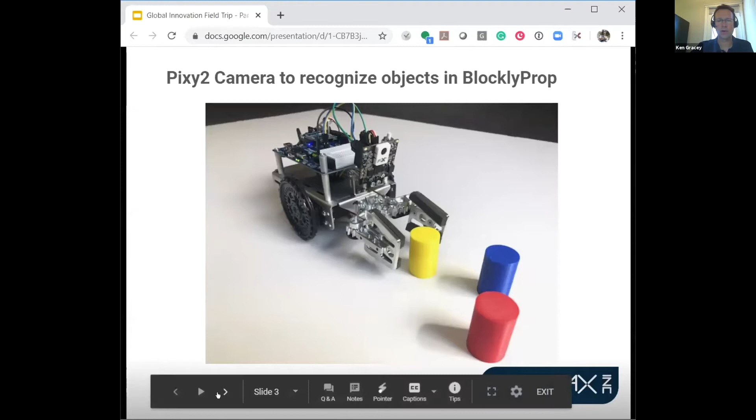Because for years in educational robotics, we've been using sensors that detect things and their distance. Like laser sensors could work up to 100 meters, infrared can detect people walking into a room, infrared emitter-receiver pairs can tell you when something is nearby, ultrasonic sensors work up to 10 feet.

So there are a lot of good technologies, or even physical bump switches, but these are all just detecting whether or not something is in front of you. Something, I say, because it could be almost anything, but whether or not you can see it depends on the technology you're using. Like a fuzzy stuffed animal may not be seen by an ultrasonic sensor. Students get to learn about these things pretty quickly - this is usually where they go.

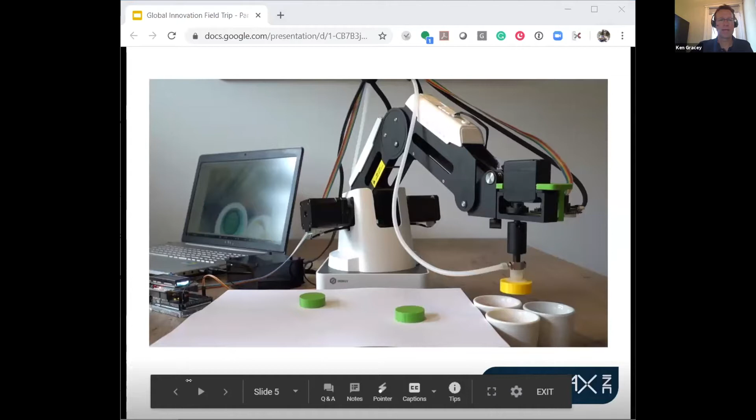I think where they're headed, though, is to do things that are quite a bit more complex in time, because I'm seeing it now. So for example, here's a robotic arm, and this is moving around some items of color, like some little round discs, picking them up, placing them somewhere.

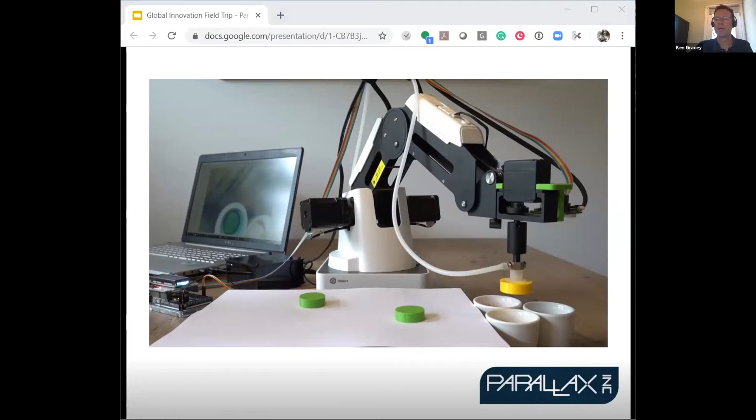Or how about this? This is a little more human-oriented task - picking up an object. What color is the object? What do you do with it?

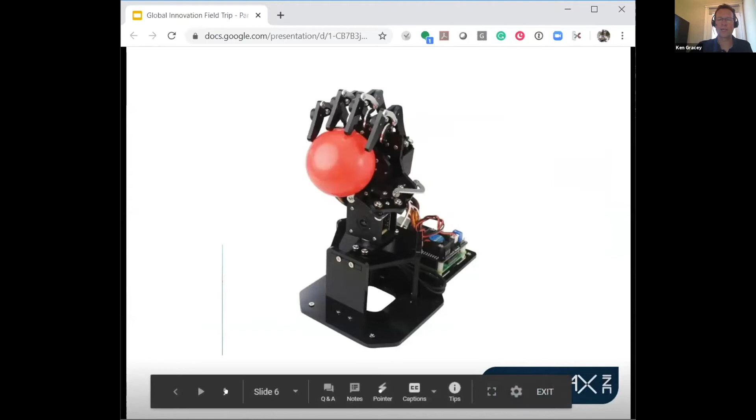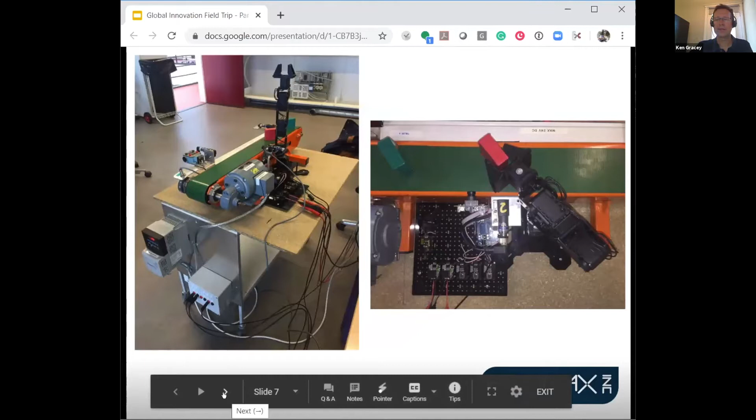And then we're seeing some stuff like this, conveyor automation type things. Also really neat, Legos can factor into this. And we're seeing games that can be played against robots.

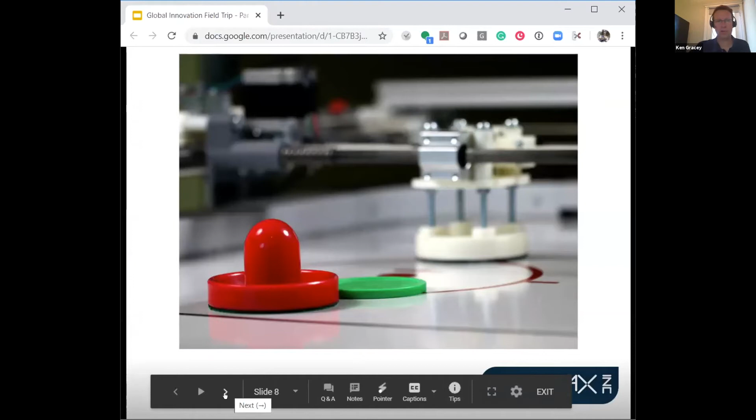Okay, so if you can track a color object, you can actually create some kind of actuator to attach to it, hit it, or bounce off of it, or move a chess piece or whatever. And of course, we see a lot of robots like this.

It's not easy. And even though we have tools now that can identify these objects, count them, sort them, what do you do with all that information? How do you code around it? This gets really tricky really fast.

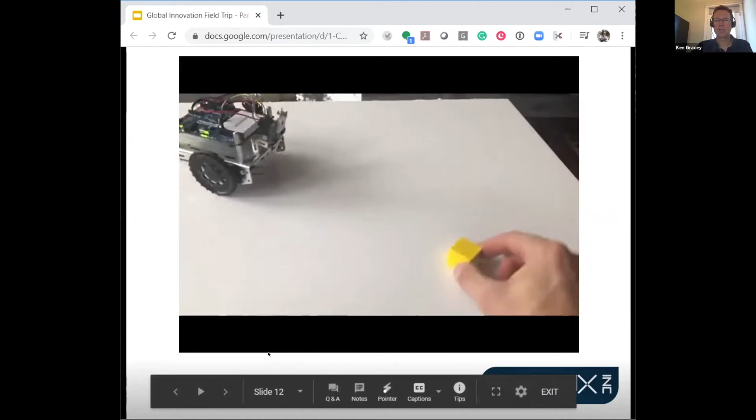So my little project that I used to learn about this started out like this. I'll show you the beginning, then the end. Here's a little robot, and it's just tracking this yellow block. This project probably took me about a week of coding to get to. But the great thing is, every time someone goes through this process, they post the code and share it. It's available for others, so I'll provide links in the chat at the end.

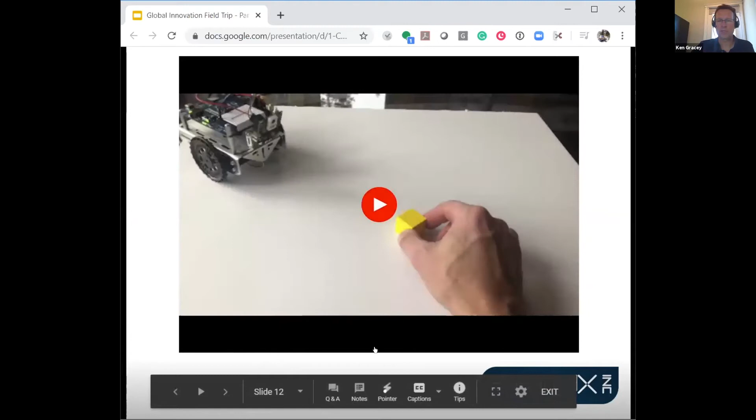Okay, so that's where I started. Now where I wound up was somewhere kind of different. So you've got to look at these projects in pieces. You have to break them down into little pieces when you're working with this, or when students are. So this is some advice I can give you.

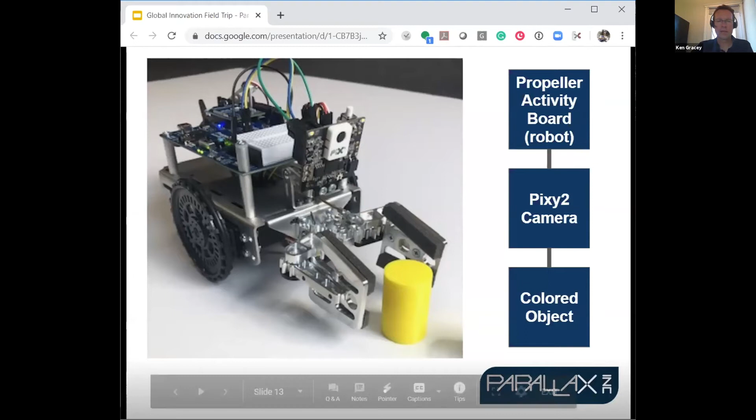It doesn't require a lot of skill. You can learn online how to do these things, but you have to be able to do subsystem testing. You have to break these problems down into little pieces with a block diagram. So here's a block diagram of the problem we're working with, or I should say the hardware.

What I'd like to be able to do is pick up the yellow cylinder and move it around. So I have 3 pieces to this really: I have the robot, shown in the top block, which has a little chip on it. Then I have this Pixy2 camera, which can detect the object and talks to the robot. And then I have the object itself. So I've got these 3 things.

An environment has everything to do with making something like this work. Again, we take this for granted as people, kind of like Oscar was showing that drone flying around in a closed indoor area, it doesn't have GPS, it has to detect objects. We take this all for granted because it's so easy for us as humans. So let's look at one piece of this at a time, just briefly.

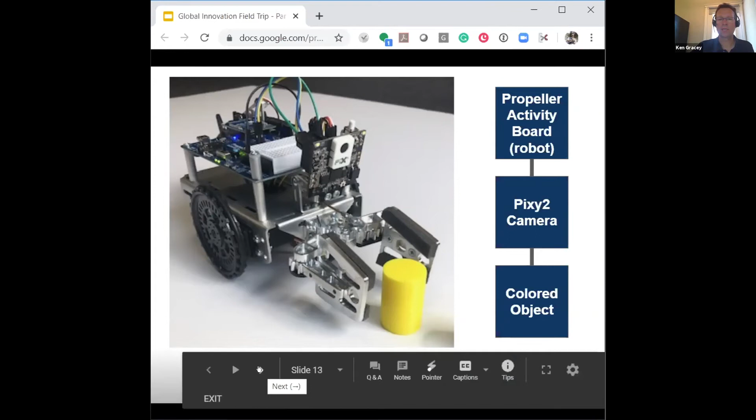Then you've got to write some code. Again, as I mentioned, this work having been done by many people, it's available online, not just for this but for other things. So for students doing projects, we really just have to help them find the resources and get them the hardware.

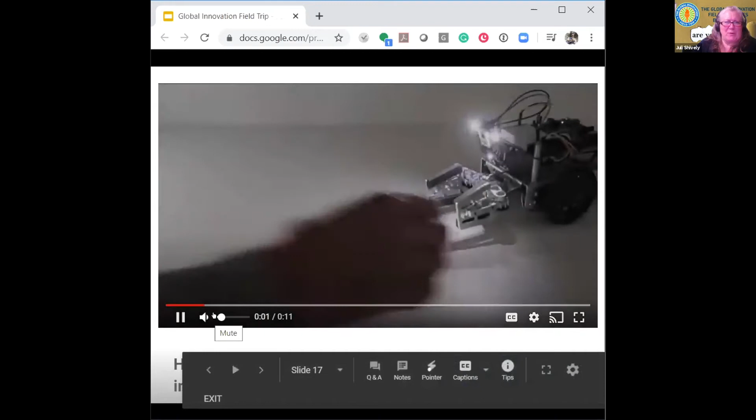Anyway, here's the result that I got out of it, after working for a while. And it wouldn't look as complicated 24 hours ago. Yeah, exactly, in a way 24 hours makes a difference on how we look.

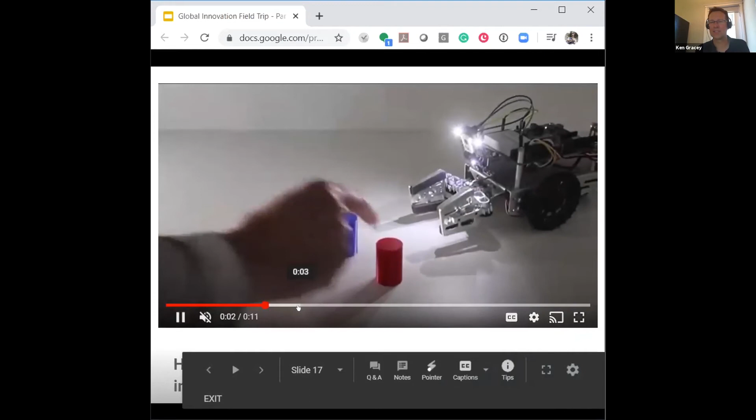You guys are hanging in there. So what happened in this video, and I'll play it again, is the robot took an inventory of what it was looking at, swept from left to right, and it was coded to go for the yellow one. And so it determined where it was in its X and Y viewpoint, and then just went after it.

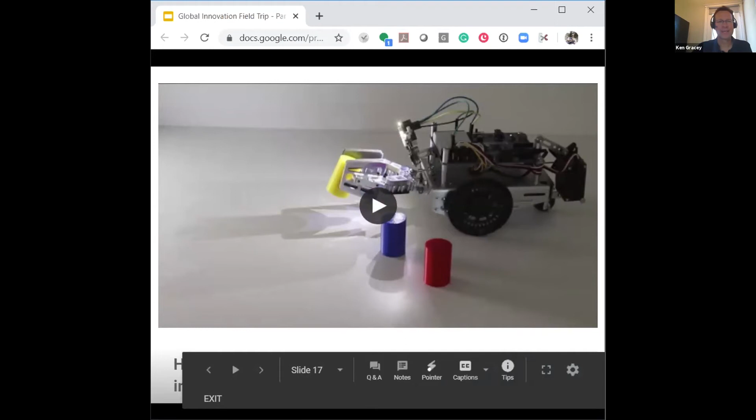And again, I'll post all these links in the chat, so just hang on a minute. Because, as Jen pointed out, tech integrates with writing, and if you're going to be useful in anything you do with tech, you have to be able to communicate it. This is a requirement we have as an employer of anybody in tech, that they have to be able to write. You could be the best engineer in the world, but if you work alone and you can't work with others and you can't share what you've done, it's really of no use.

So in this case, this project is written up for you. So the second thing I wanted to show that I'm playing with too, and I think this is really good for students to be using in any invention type project, is the Microbit. And why do I like this thing? First off, there are a bunch of ways to program it. You can program this in block code, JavaScript, Python, whatever. What I'm showing is in Python.

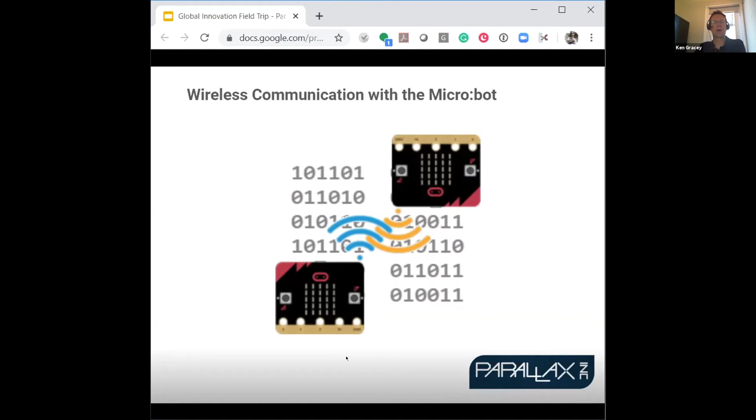And one feature in particular here that's really nice is the wireless communication. Wireless is all around us, our phones, our routers, everything we're doing. Even any appliance you buy now has some wireless capability. So this is a little $17 controller that you can buy just about anywhere now, and it's loaded with stuff. So if you think about the inventions again, just look what's built in here. No electronics needed, it's all packed onto this board. You got a compass, accelerometer, there's a temperature sensor, there's a wireless radio, there's a bunch of LEDs, buttons, okay?

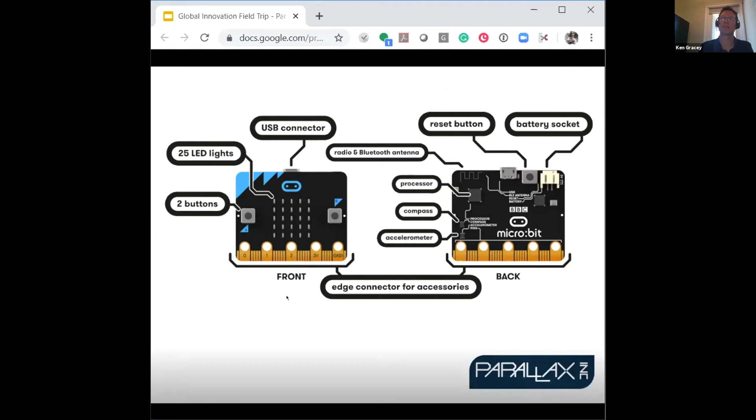So you can connect this to anything that moves, shakes, has temperature or whatever, and if you still have to connect stuff to it, you can use this edge connector. Okay, so I like this little tool.

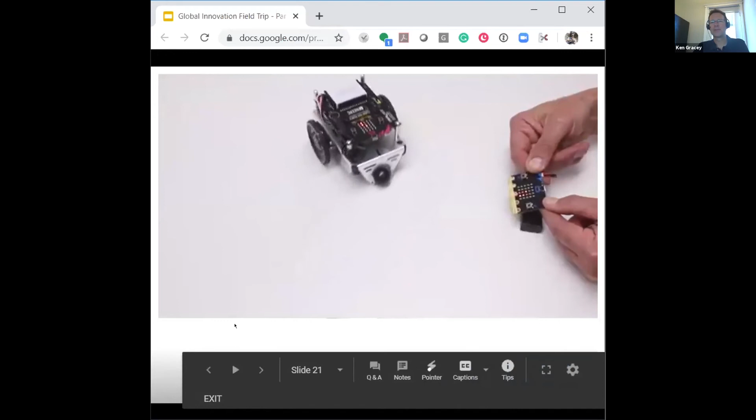And what I was looking at here was just the ability to use it in robotics, well, because I make robots, and how easy is it to do. And so I started out with this project, but wait till you see where I went. It's pretty cool. So just driving the robot around using the accelerometer, that is, you tilt the board and the robot follows.

What do you think of that? It's cute, right? Now, a sixth grader can do that.

Okay, so got to have you picture a situation here. You have a student, actually a classroom full of kids. Let's take 30 of them. I saw some of Tim's kids, I saw his 2 sixth grade classes, and it was amazing. Some of them had their stuff done.

This was way back in November, so they weren't all finished, but they were using the Parallax boards, and I'm not sure what you call the totality of what you have, the equipment they got from Parallax, and they're pretty phenomenal little things. They demonstrated a few of them for us. Well, it's a matter of being a teacher, just throwing it in front of them and finding the resources. And all this stuff is new, so not every teacher can know about it. But experiential learning, letting the students discover it is really what it's about.

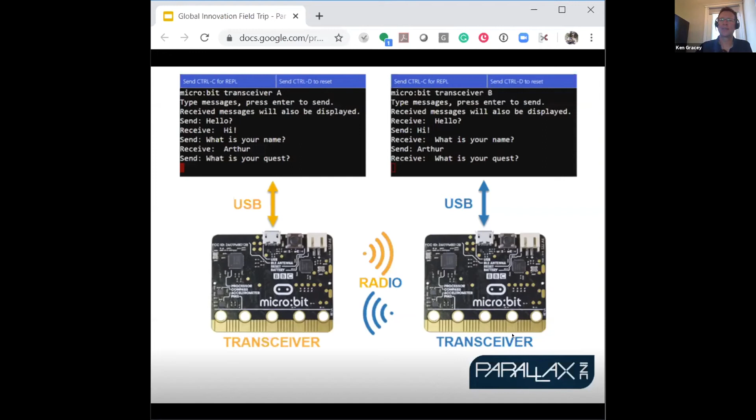We all want control. So I want you to picture class, Tim's class, or Jake's class of like 30 kids, and they're all on their computers, and they have these little microcontrollers connected to them on a USB cable. And they suddenly open up a chat in them, and that means they're typing commands on their computer which are sent out through their microcontroller to other students in a very open, unencrypted way. So it starts out just with fun, but then it turns a little bit crazy, and then suddenly the teacher needs to shut things down because it can get out of control.

So there are only two lines of code here. This is the whole code that I'm going to show you running here.

It's 24 lines, but 2 do all the work: radio send and radio receive. It's just a little loop checking to see if anything's come in and if anything can go out. This allows you to take one controller, connect it to something like a sensor, and send data back to a computer.

Let's look at this application. Say you've got, this is actually my computer, and what I have is two browsers open side by side, with 2 microbits connected to 2 different USB ports. It's like having 2 computers on 2 students. The tutorial documents this, and it doesn't require any expensive hardware, nothing special from Parallax. You can get these things anywhere.

So basically, you're going to load the code into both microcontrollers, and this video I pre-recorded, so I'll switch over here. I'm going to flash them both with the same Python code.

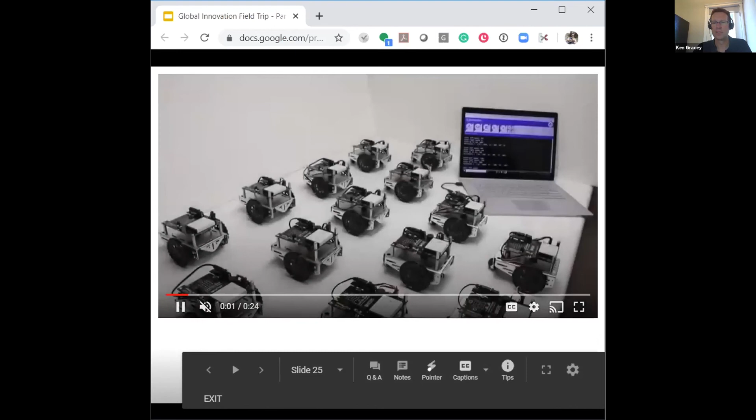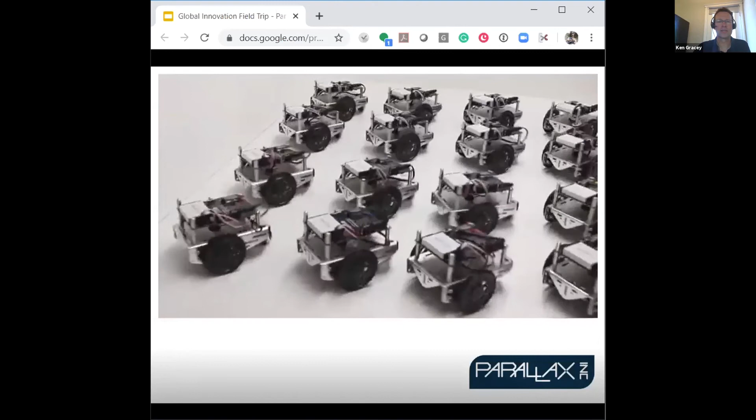So type in some commands on the computer, and then you can see every single robot can respond. Pretty crazy, huh? Fun. Yeah, so I'll post that.

Let's see, how are we on time right now? I'm just about done. No, you've got actually about 15 minutes left, I think. Oh, okay, good, I won't even need it all. Let me look to make sure, because I could be totally wrong. But there will be some questions there. Yeah, we'll take the questions and use it until 11:30. Oh, okay, good.

All right, so teachers who want to get into this, or students, anybody interested, there are a couple ways to go about it. I will post all the links to chat, and then we could talk about whatever. But this is a good way to get started - we actually created this for the Invention Convention. It's called the Inventing Kit, and there's a series of slides that go with it and show students how to wire things on a breadboard and then write some code for it. It's nice, fun, basic stuff.

And if you're a teacher, you can sign up for this, which happens next, the second week of June. We are running a 3-day, hour-and-a-half per day workshop with Python and robotics. This is free for up to 80 teachers that we accept, and it's actually paid for by the Cyber Innovation Center, funded by the Department of Homeland Security. So it's only open to American educators because of that restriction, but there is no cost. I'll drop this link in the chat as well.

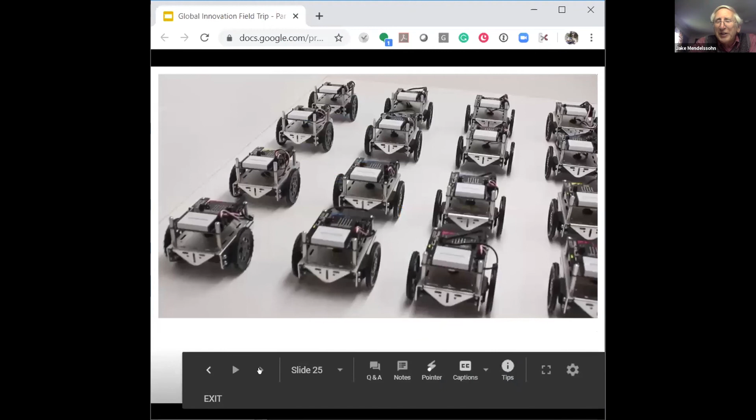The nice part about this is Ken showed a lot of robots that were moving. What he didn't show was all the blinking lights and flashing lights and OLED screens with things going on. The kids really enjoyed all the blinking, flashing, making sounds. They made musical instruments. It was really exciting.

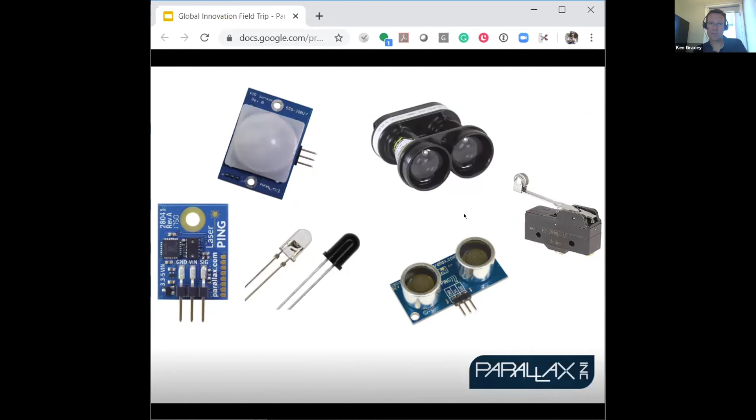I was just talking about sensing, right? Sensing something you can see, but there are sensors available for measuring just about everything now, and they're getting easier to connect. These sensors are for distance or detecting something, but anything in your physical environment now can just about be measured.

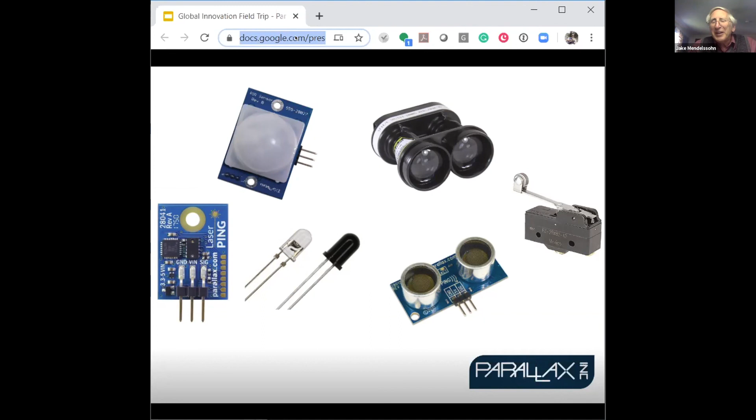Julie, you could use this. I'll just share something with you. The most exciting time in my life was the first time I ever programmed a microprocessor, and I got an LED to blink. That's all it did. It turned on, it turned off, it turned on, it turned off. I was just so excited because once you have that very simple ability, you can go off and do anything in the world. It's amazing. Ken showed some very sophisticated things, but just turning an LED on and off, or turning on different LEDs and lights and making different sounds, it's a really exciting opportunity for students.

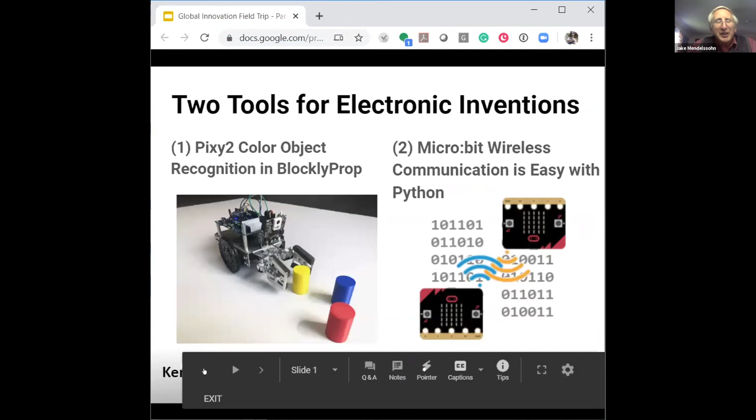So yeah, easy. In terms of cost, the costs are coming way down. Once you have a microcontroller, 10 to 15 bucks, 20 bucks, then you can go to Amazon, and there are some super low cost sensors, like $2 to $5, that you can interface to these devices. You just want to do a little Google search on the sensor and the name of whatever you're using.